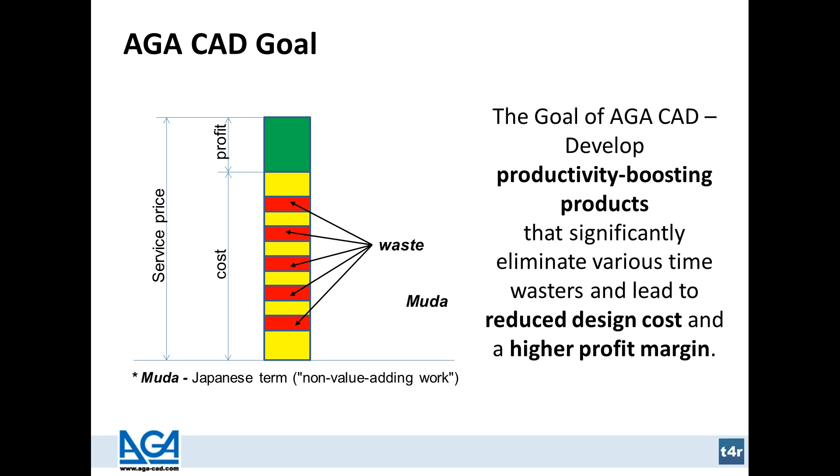The first solution is Smart Diffusers. This solution goes for the diffusers, to insert the engineering information into it from the graphical form into the numerical form, and to use this information in finding the optimal size of a diffuser, or many functionalities there. You can find them also at aga-cad.com. You could look, you could see, you could browse there.

Also we have the R-Heating that goes for radiator heating systems, for balancing them and for many things there. Also we have the Smart Hangers. It's almost a new product from us, so this goes for hanging and supporting elements, line-based elements. We also have the BIM Tree Manager for the management of BIM elements. Also we have the Sustainable Design Pro that goes for building energy calculations, for cost estimation and other things.

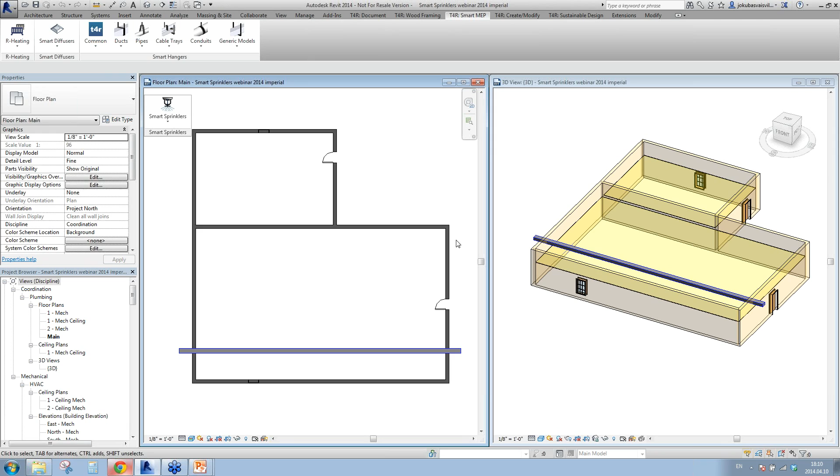Firstly, I will draw a pipe, maybe somewhere here. That will be the distribution pipe for our sprinklers. I will place it 100 inches above the ground - it's not the ground, now it's the ground - and now I will make that.

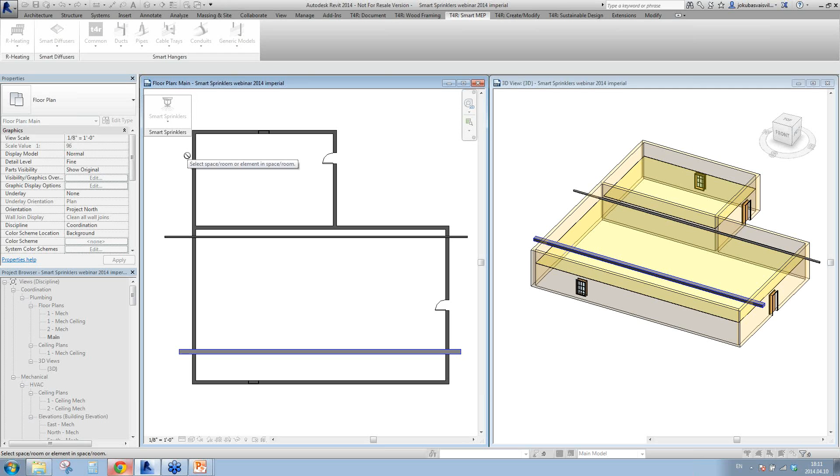Okay, so I will insert the position symbols as I said before. To insert the position symbols, you have to identify something inside the space. Either you can press the button on the space mark, or on the doors, or on the window - it doesn't matter. I will use the space mark.

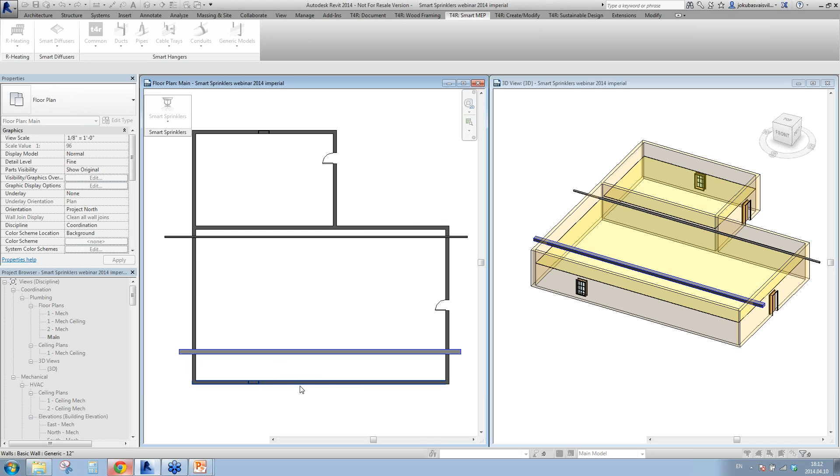After, you have to identify the x-axis, which will go like a wall. You can use any wall in a project to distribute your elements according to x and y axes, and that wall will go for the x-axis. It doesn't matter what kind of project you're using - a real Revit project or a linked Revit project. If you have a linked Revit project, you can press escape to zoom in and press somewhere near here, and it will find the nearest wall, and take that wall as the x-axis here.

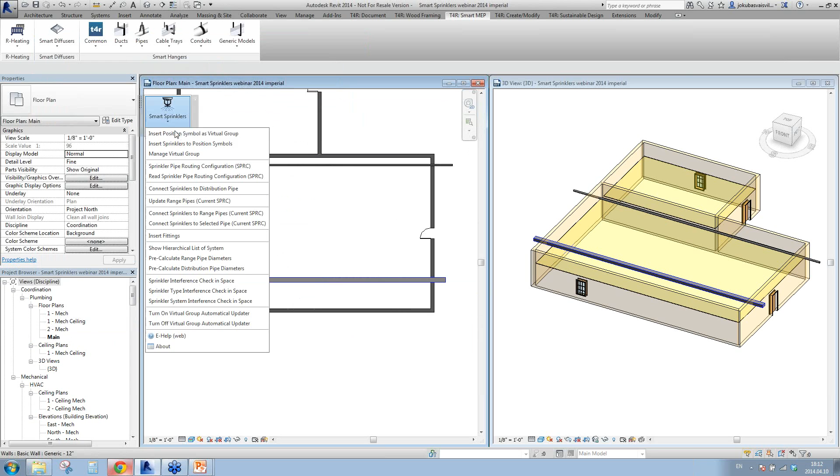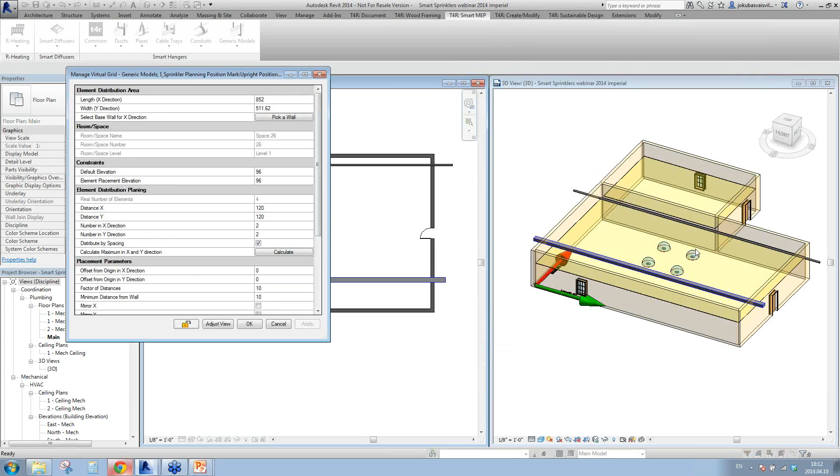Now we have to identify what kind of position symbol we want to insert into our project. We have the upright position marks and pendent position marks. I will use the upright position marks first, and you will see a really simple dialog box for the management of distribution of our generic models in our virtual grid.

In the top of our dialog box, you can find the element distribution area. Our solution automatically finds the lengths and widths of our space, and here we have the possibility to change the coordinate system, as we have y on x or x on y axis. For example, if I take this wall, it will go in a manner like this. If I pick another wall, it goes like this - so the distribution will go by y and by x axes.

The second thing we can find in this dialog box is room and space information. For example, we have the room and space name, the room and space number, and the level where our room or space is located.

The constraints here let you write the elevations of your needed elements, where they should be placed. For example, I want to place my elements at 120 inches above the ground floor, and all my elements will be placed at that elevation.

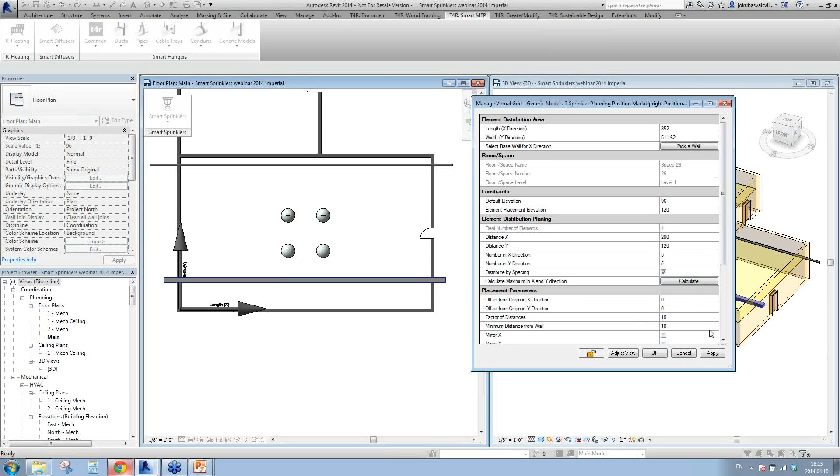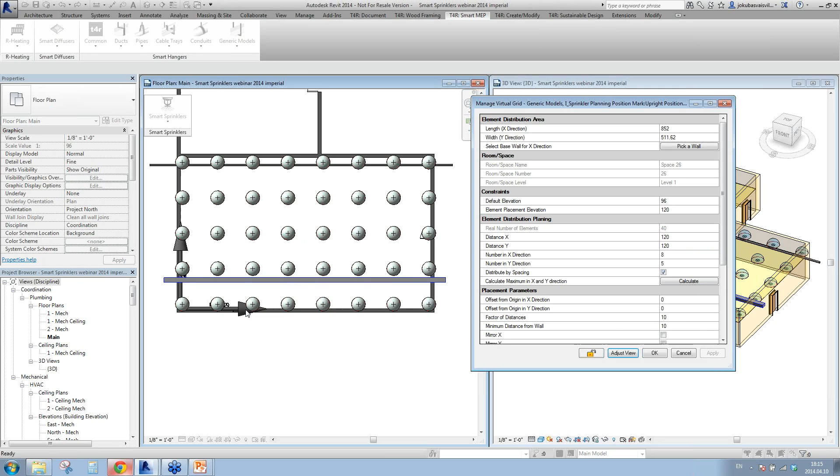Let's check, and we have such a dislocation of our sprinkler elements. For example, I need 120. I recalculate everything, and as you see, in a second everything is working, and all the families are moving just in a second.

The other functionality is, for example, I want to place not all these sprinkler heads, but only 5 by 5 elements in rows. I don't click to calculate my number, but I click to apply that configuration. And as you see, the same distances are now here, but they are in the middle.

If you don't want them in the middle, but want 5 by 5 sprinklers, you can choose not to distribute by spacing and apply that functionality. As you see, it will find the solution to make the distances between elements equal, and everything is distributed like this. So it's really simple and really good.

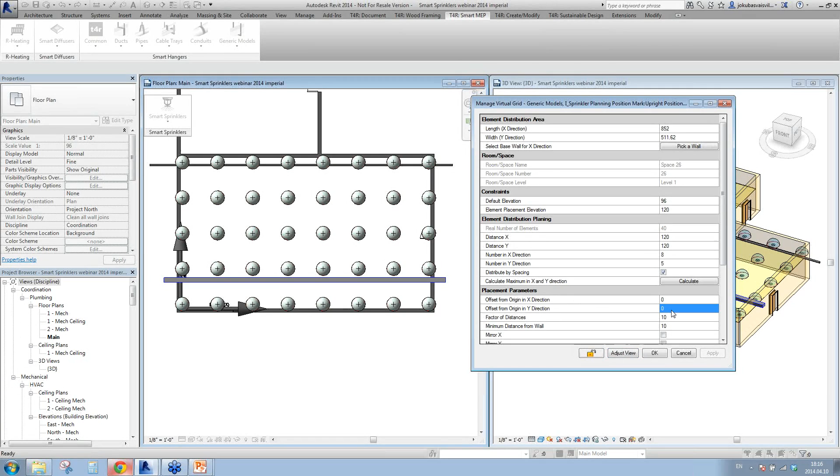As you see, our sprinkler positions are placed where our distribution pipe is also placed. For example, I don't want these sprinklers here, so I could use the offset functionality, and I will offset them by 100 inches like this, but from this side.

But if I want to move them otherwise, we have created the mirror Y and mirror X functionalities for that. I could press mirror Y and apply that to my project, and as you see, it goes from the other side of my coordinate system.

So here we have the factor of distance that goes together with minimum distance from wall. The minimum distance from wall defines the minimum distance of elements from the wall in a space for your own configuration of distribution of virtual grid elements. So your virtual grid elements will never be at less distance than you define here.

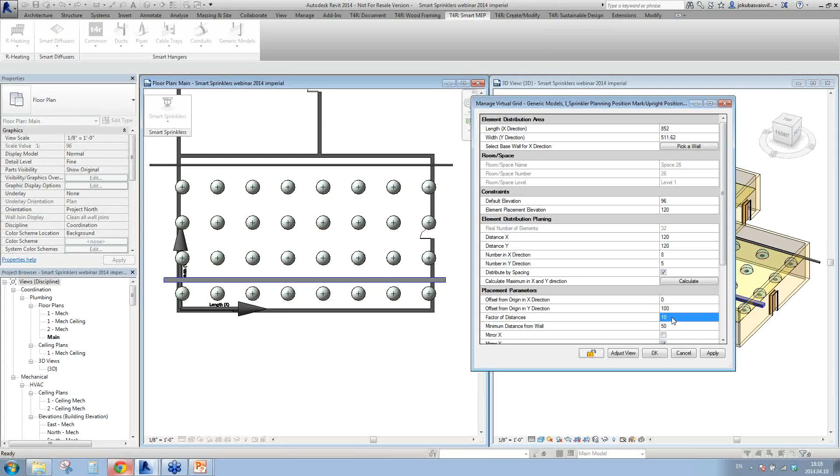And the factor of distance defines the multiples of distance. For example, if your factor of distance is set to 10, then the distances between virtual grid elements are rounded to the nearest number which is a multiple of 10. It's quite simple, I think. And I apply everything, and as you see here, we have gaps not less than 50 inches.

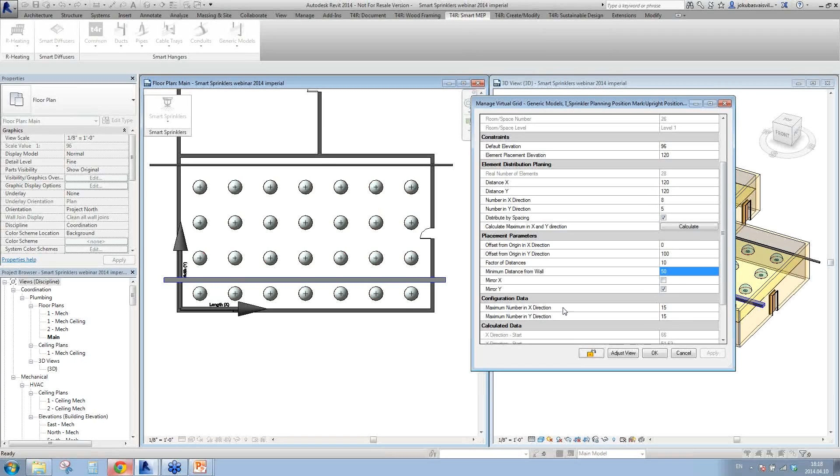The next thing we can do is define the configuration data, the maximum number of elements in X and Y directions. For example, I want only 3 elements, not more than 3, in my distribution of elements. I can apply that functionality, and my 3 elements will be distributed there.

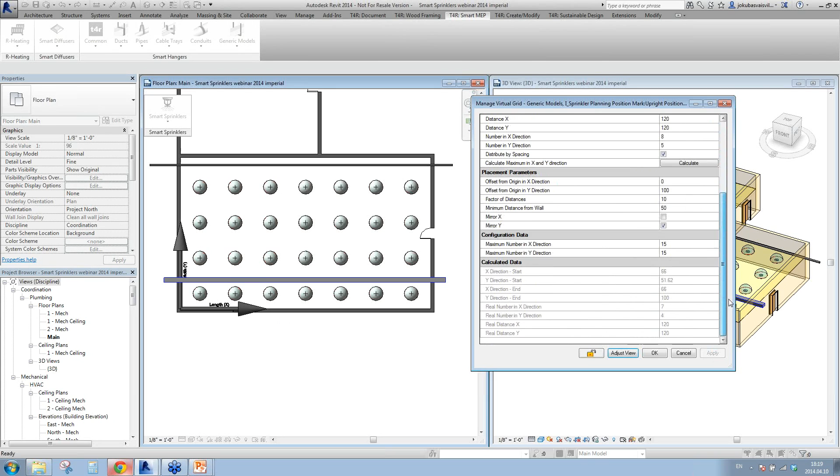I will leave everything like it was, and here we have the calculated data: where our first element is placed on X and Y directions, on those coordinates. So it goes on X 66 inches, and on Y 51. The last is the number of rows and the real distances between our sprinklers.

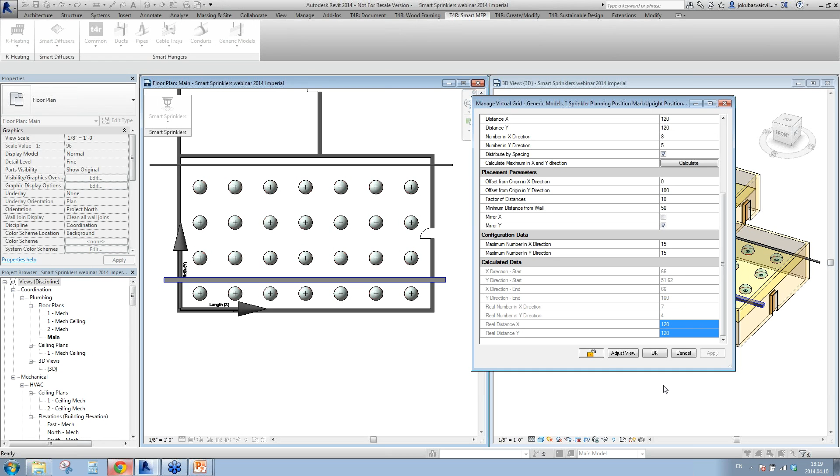So as you see, we really quickly distributed our elements in a space, and I want to do that again for my pendant sprinklers. So I will do it fastly.

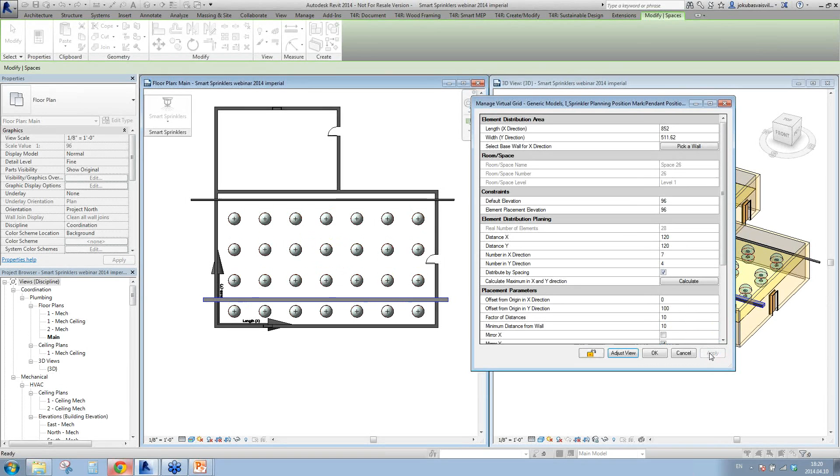Pendant positions, I want them here. I will calculate, place, and make an offset. Okay, we'll make it like this. What's happening? They are in the same place as I wanted, and I can offset them, for example, like this. Oh, okay, brilliant.

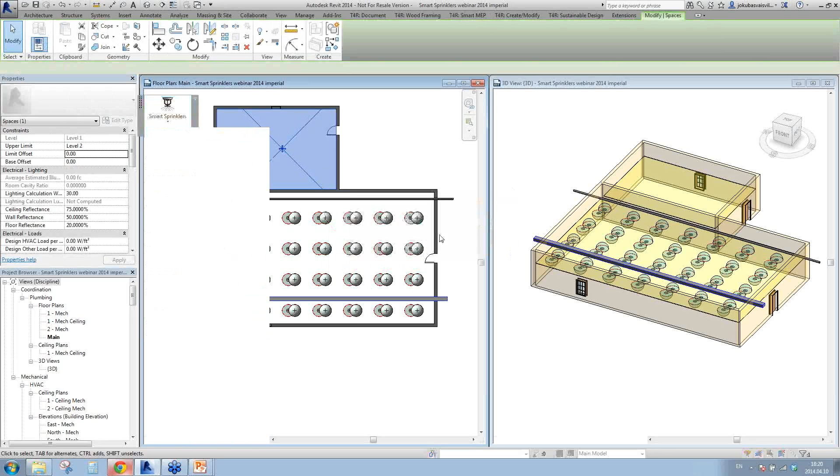Yes, and I will do the same for this little space, and I will show you some more functionalities. Don't be bored, and I will make some interesting things here.

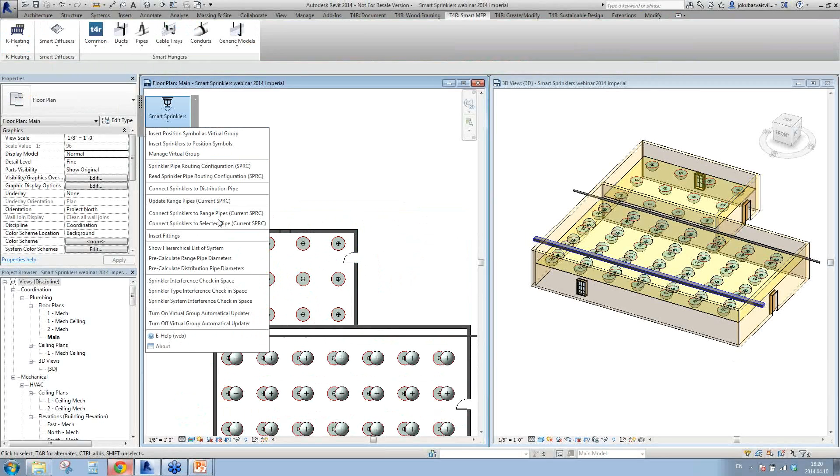As you see, all the sprinklers are distributed like this, and we have created the functionality where you can anytime manage your virtual group in a project. For example, I can make some changes here, like this, recalculate, apply, and as you see, changes happen just in a process.

Now, looking from the BIM side of the design, at any time of a project your architect can make some changes, and you should be able to make changes together with him. So we have created the functionality to turn on the virtual automatic updater. That means if I turn it on, all my distributed elements will move together with the boundaries of my space.

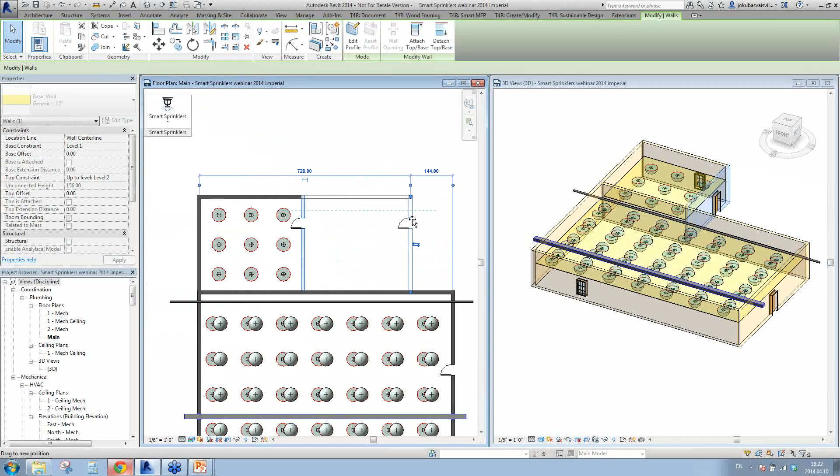But if I turn off this, I could move my boundaries, and all the places will stay in the same positions as before, all the virtual groups, and together the sprinklers. So it's really a useful thing if looking from the BIM side of design.

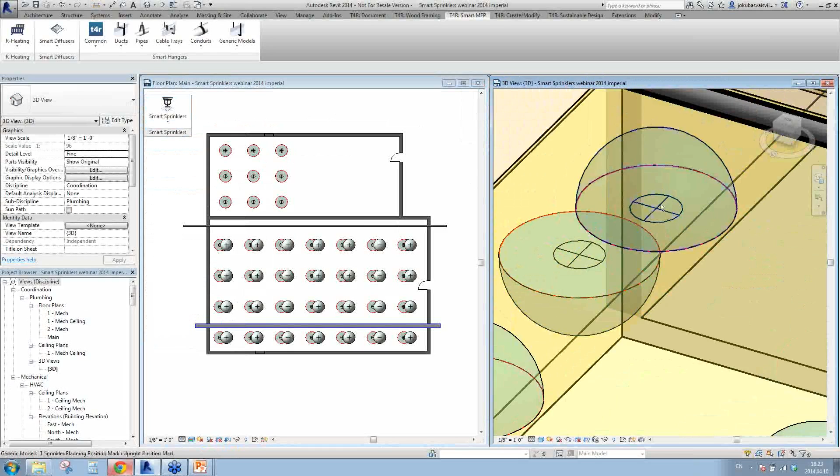The next thing I want to show you is the real sprinkler placement, because as you see, we placed only the position marks here. We could use the insert sprinkler to position symbol functionality, and then you have to identify what kind of sprinkler you want to insert into the project - is it the pendant position mark or the upright position mark? So I will use pendant.

Here we have our created sprinkler heads that you could use and find in our sample project. When you download our sample project and trial our smart sprinkler solution, you could find all these elements inside the sample project and use them.

And smart sprinklers, truly, works with all the families. You can use your own sprinkler families, you could use our created families, you could use Revit families, it doesn't matter. So I will use the sprinkler, dry one, pendant, fully recessed, hosted, and I will use this one.

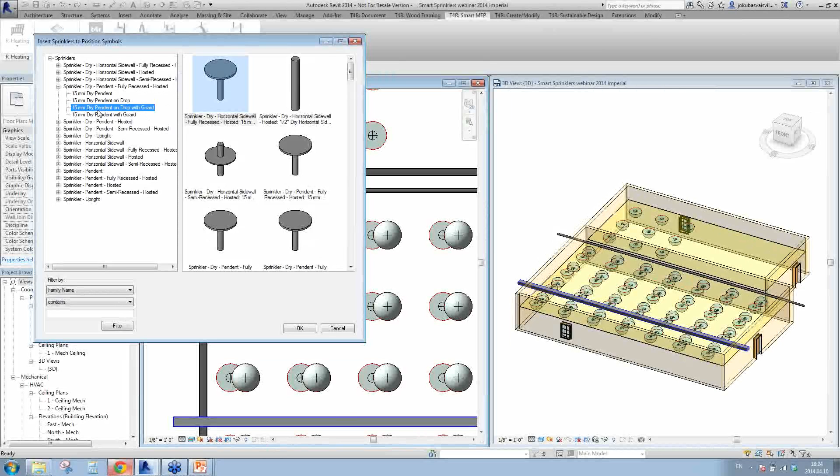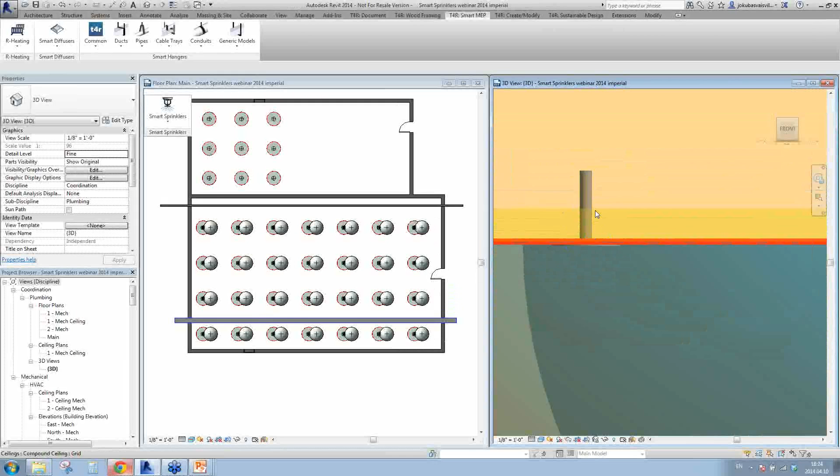Okay, and in a second all the sprinklers are distributed in a space. Let's check them here, and as you see, they are in the very middle of our position mark. If we look from the front, we are face-based elements, so they attach to the ceiling.

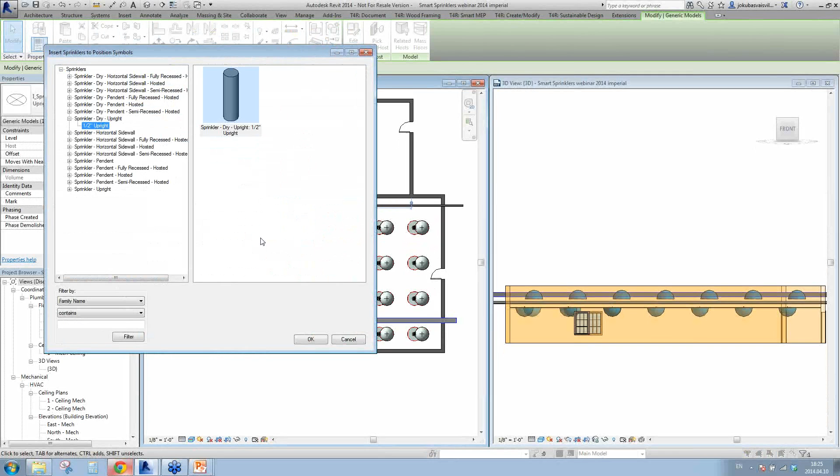And we can place another sprinkler - this is the upright sprinkler - and in a second they are distributed there. Now the second step after the distribution is connection of our sprinklers into one hydraulic system.

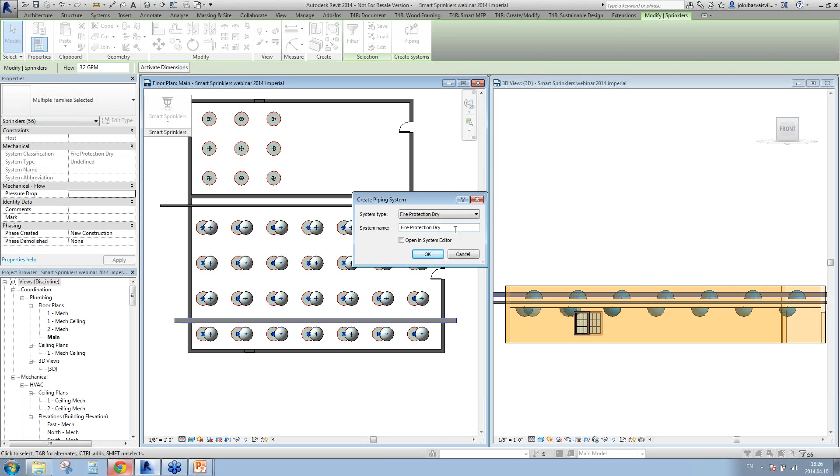I will take them all and filter that. I will use only sprinklers, not generic models that are our planning points of sprinkler places. I take the sprinklers, and using the Revit possibilities here, I will make the piping system, and that is all. Our elements are now in one hydraulic system.

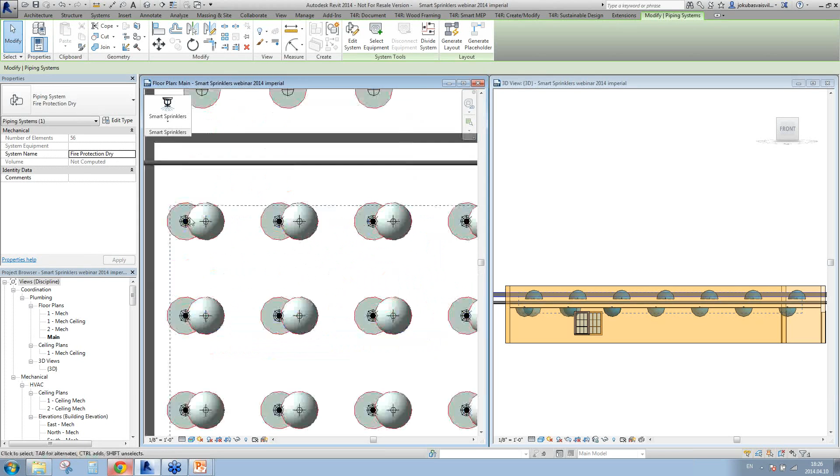Why is that? We have to identify that all these sprinklers are in one system because they have some flow information - every sprinkler has flow information. Afterwards we will see how the smart sprinklers will make some calculations according to your standards, from the NFPA standard that goes for America and Canada, I think.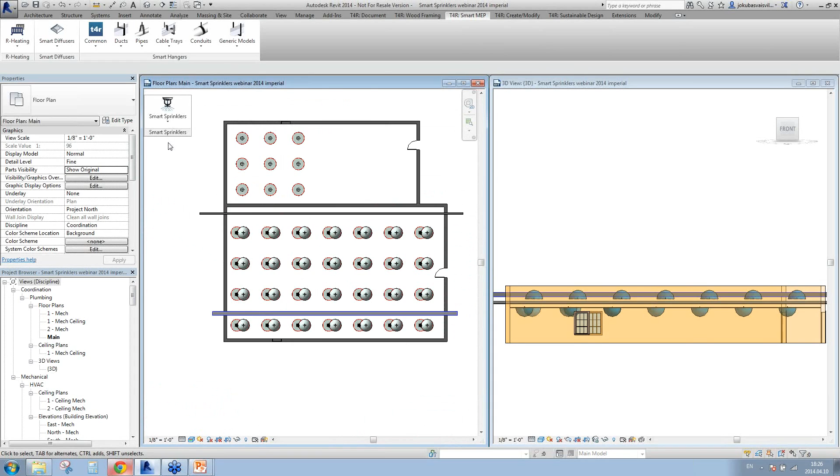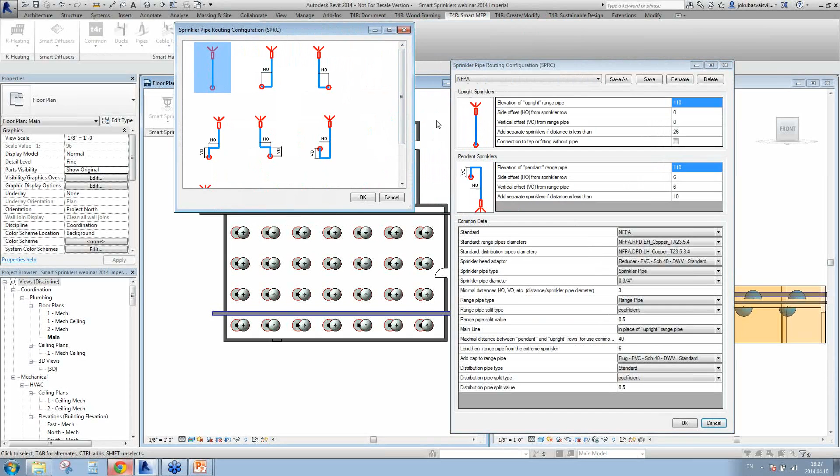The next thing is sprinkler pipe routing configurations. Here we have to identify all the routing things that we will use in our project. At the very beginning, I want to say that we have created the most popular sprinkler connections - you can open here by double-clicking the image. We've created the most popular connections for pendant and for upright sprinklers, and you could use any of it.

The same thing goes for pendant sprinkler. Here we can identify the elevation of upright range pipe, the elevation of pendant range pipe. Here we have 'add a sprinkler' - if the distance is less, this functionality adds a separate pipe to sprinklers if the distance between the main row and the sprinkler is less than entry distance. For example, 26, as before.

Also we created the functionality like a connection to tap or fitting without pipe. With this option on, you are able to connect your sprinklers directly to the taps or fittings - for example, BlazeMaster fittings.

And here we have the side offsets. The side offset horizontally, HO, that means the distance between the pipe and the sprinkler. Also we have the vertical offset, VO, from the range pipe. So it's going like this, and the separate sprinkler is placed here.

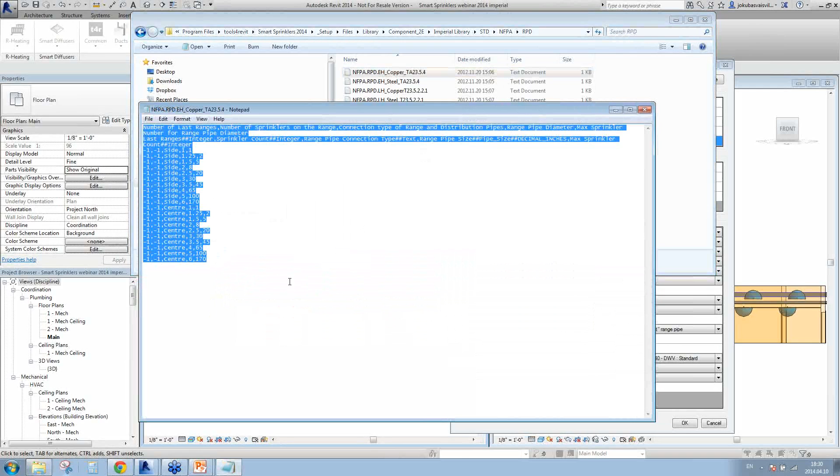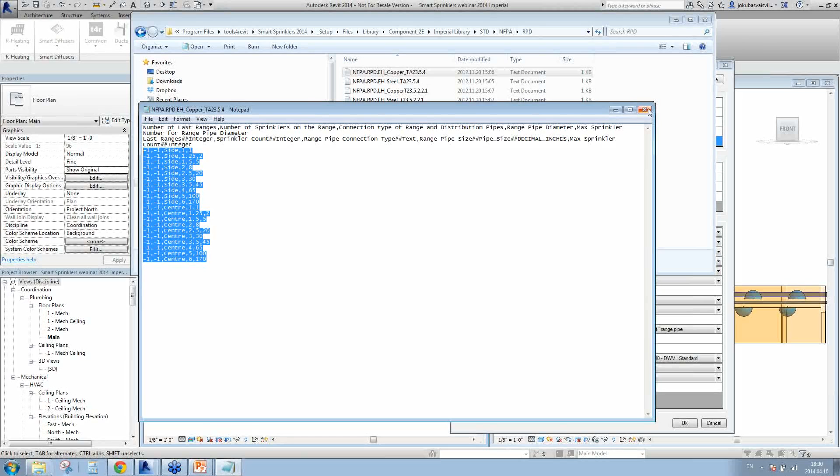All the things are written in TXT files, and anytime you can watch, look to them, and make your own standards for your pipe diameter finding, to find your pipe diameter.

Yes, and you have to identify according to these standards. You have to identify the exact table that is written here, TA 23.5.4. That means that we will use this table from that document, not from the document that I showed you here, but this document is placed on a paper in NFPA standard.

So you have to identify the standard for the range pipe diameter finding and for the distribution pipe diameter.

The next thing what you have to do is a sprinkler head adapter, to find the sprinkler head adapter. As you see, I have here many sprinkler adapters because you can place the families into the project, and if it is possible to use them, they will show all these families here, and it will be really simple to find your needed family.

I will use the generic standard transition, for example.

Afterwards, we have the sprinkler pipe. I forgot to explain - here I have placed my distribution pipe, and this distribution pipe has all the routings inside, the routing preferences, and all the pipes should have the different or the same, as you want, how you work. It depends on how you work.

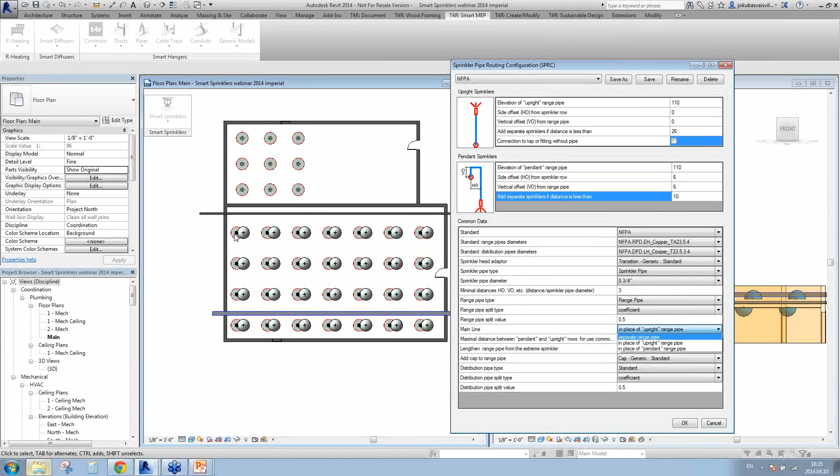Firstly, I will show you the separate range pipe. That means that we will use the separate pipes for pendant and for upright sprinklers. And yeah, so let's try this possibility.

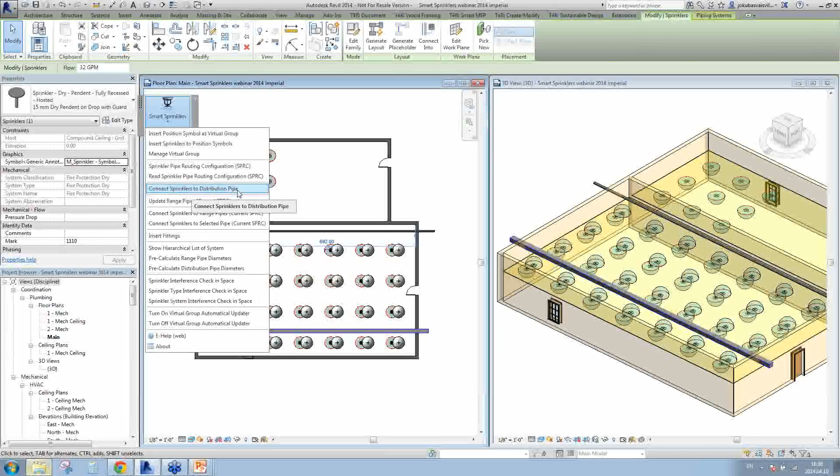Let's try. I will click on any sprinkler in my space, and I will connect sprinklers to distribution pipe, and all the sprinklers in that space will connect according to our created rules, our routing preferences, and our standards. It will connect the distribution pipe, and I have to click onto the distribution pipe.

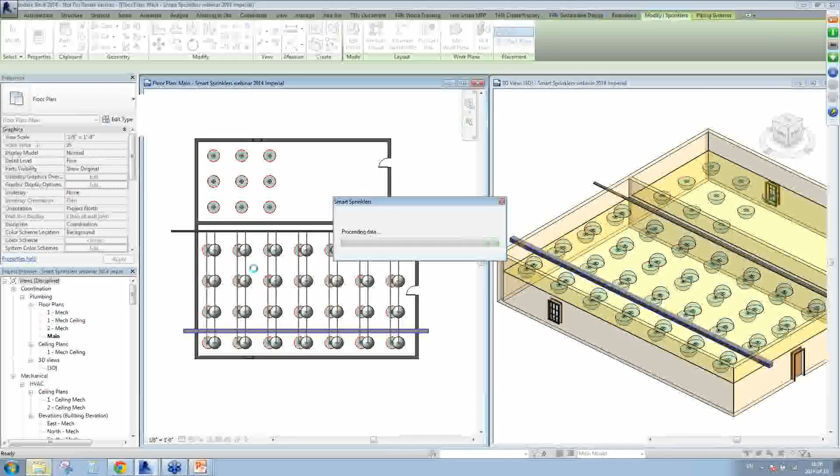As you see, very fast all the pipes are distributed in my space. It inserts the fittings, it routes everything, it cuts in the middle of our pipes, and many more things this solution is doing now.

And we could look here. I will turn off the thin line, turn it on. As you see, we have such a connection here.

Also, I have the straight connection for the upright sprinkler, as I made the sprinkler routing preferences here. As you see, the pendant one is going like this, and the upright is going straightly up.

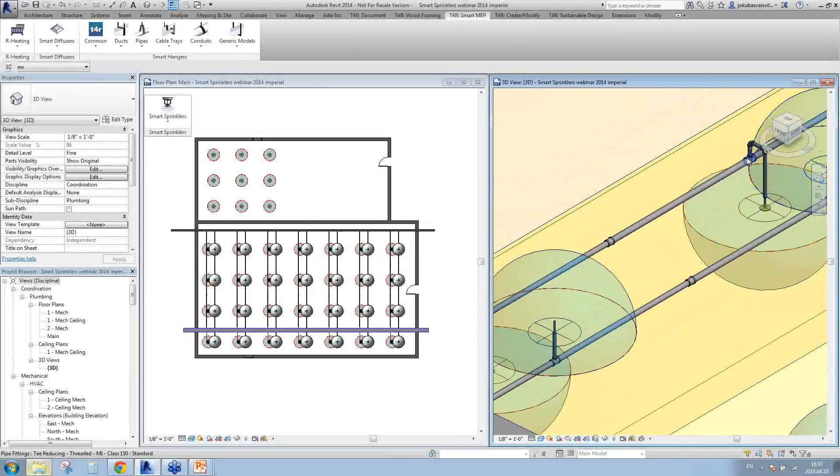Here we have the splitting points. As I said, they are in the very middle of our distance from this connection, and from this connection we can check is it really like this.

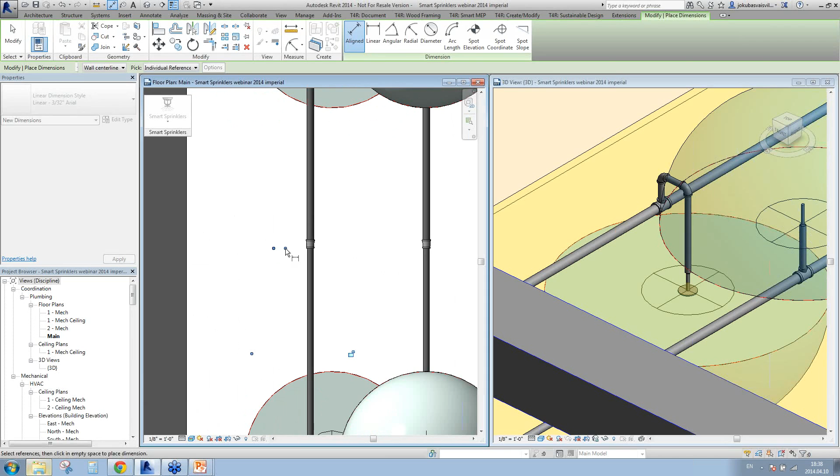I have this point. How could I find the middle of that? From here to here. So as you see, it finds the middle, and it splits the pipe in that place.

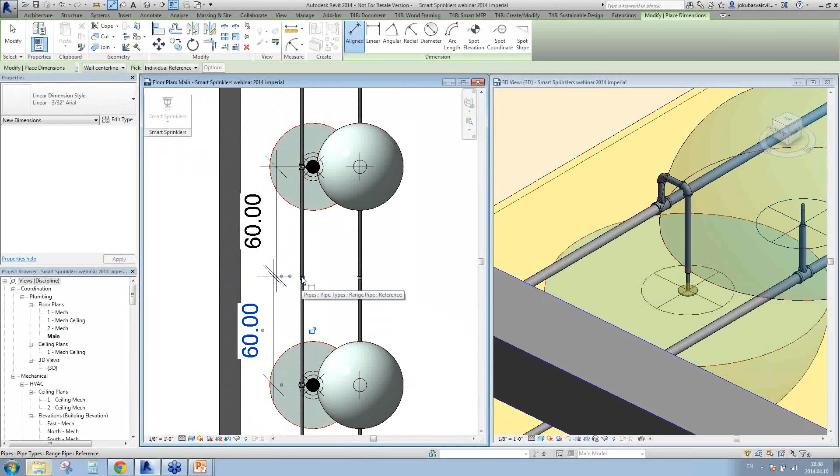I will remove my segments, my pipes from here, because I want to show you the next functionality of sprinkler pipe routing configuration.

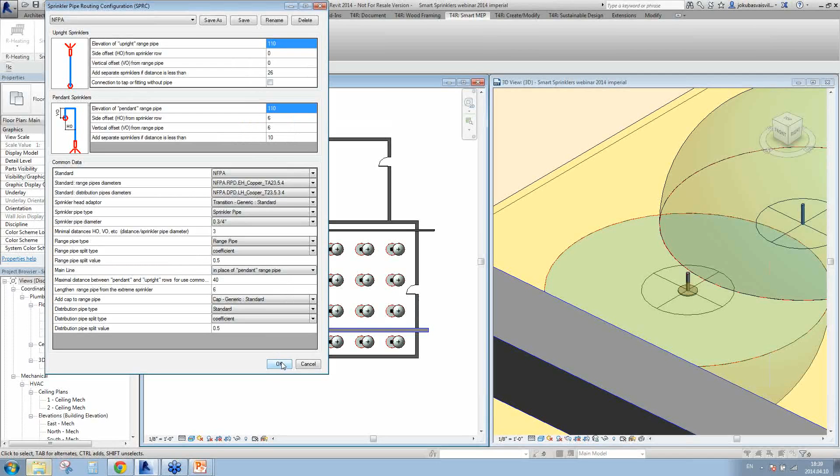It has some differences here. In one way, you could not place the elements, the pipes, in the other way you can, because you have the routing configurations that we made before. One should be the bends, and the other should straightly go to upright.

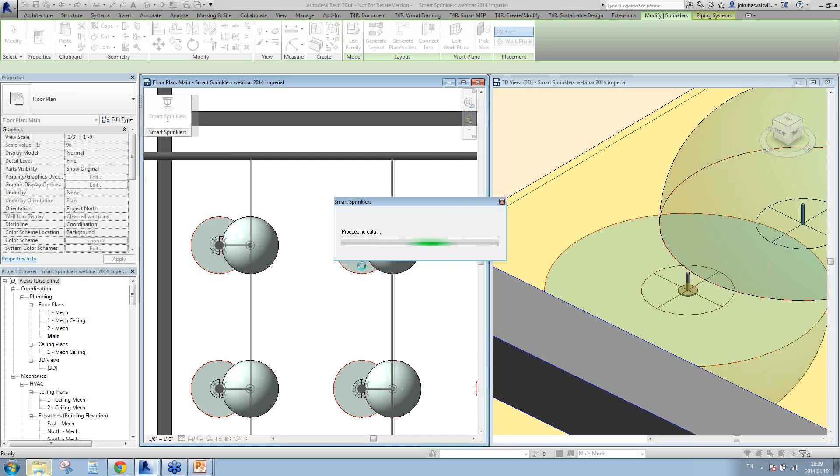And I think everything is going well now, and in a second we will see what's happened, and the result, how our sprinklers are connected now.

So as you see, one of our sprinklers is going straightly up, and the other is going to the bends like this. And you can use various functions here, as I said before, for connection of our sprinklers.

Yes, so it really looks nice, and it's going very fast, I think so.

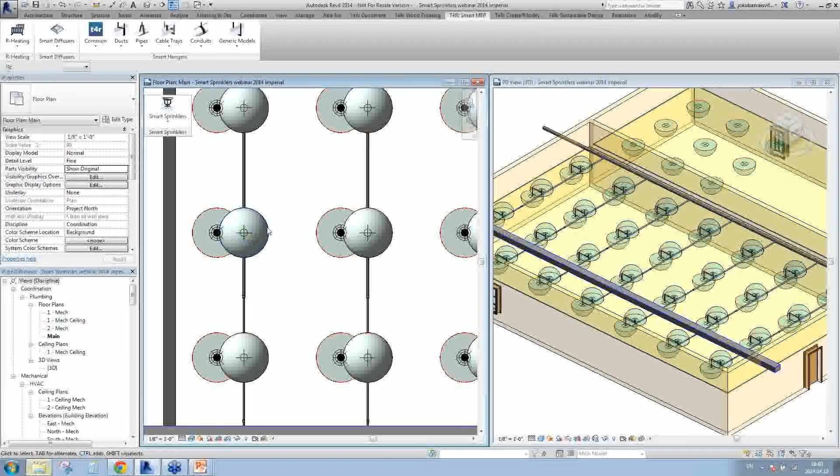If we have some problem that we want to place some more sprinklers into our space, but we don't want to make the distribution again, and only here we want to have fire sprinklers.

We can, I will show you, we can copy that sprinkler and place it somewhere here like this. Oh, I don't copy the sprinkler. Yeah, it's okay. Now I will show you how to work with that.

You can connect your sprinklers at any time into the system and to recalculate the sizes of your pipes.

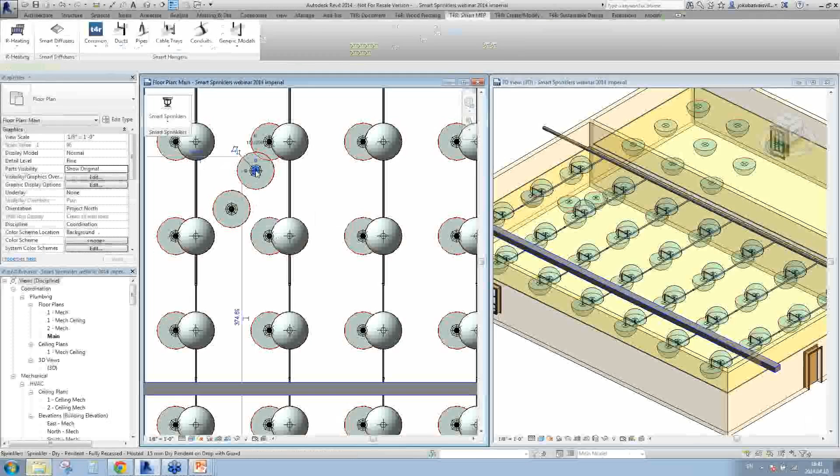And we could use the connect sprinklers to range pipes functionality. We have to identify firstly the sprinkler, then identify the range pipe. As you see, it's really simple. It goes in the same manner as this, because it has the same routing preferences that we made before.

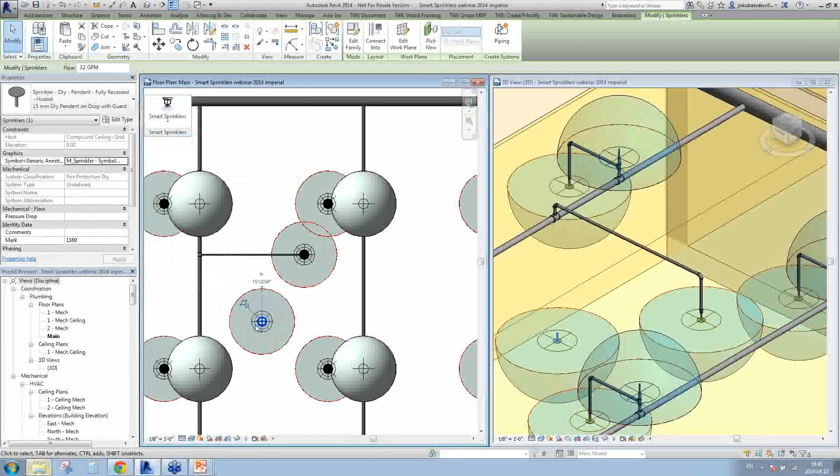Also, we have one here, but for example, I want to make a mistake. I will show you. I want to connect this sprinkler here, but I know that the distance is less if I connect it to this pipe, and it will make fewer elements in a project, and less money wasted, and everything like this.

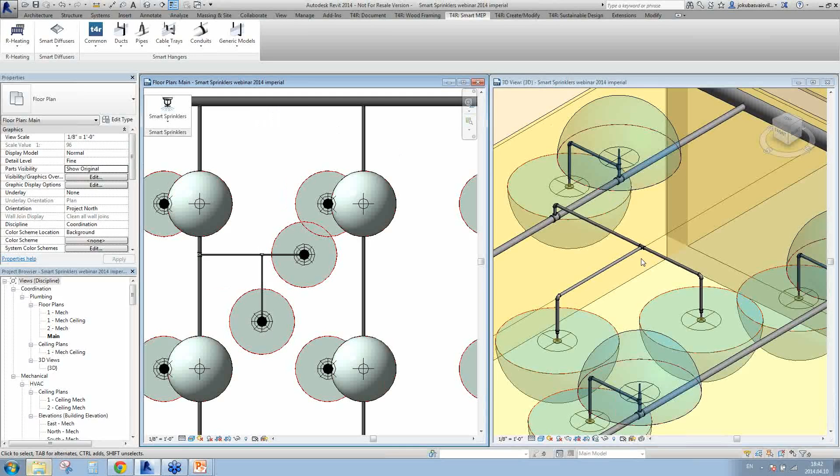So I will connect the sprinkler to the selected pipe, and I will select this, but the solution finds the nearest point to intersect, and it intersects our range pipe, not the distribution line.

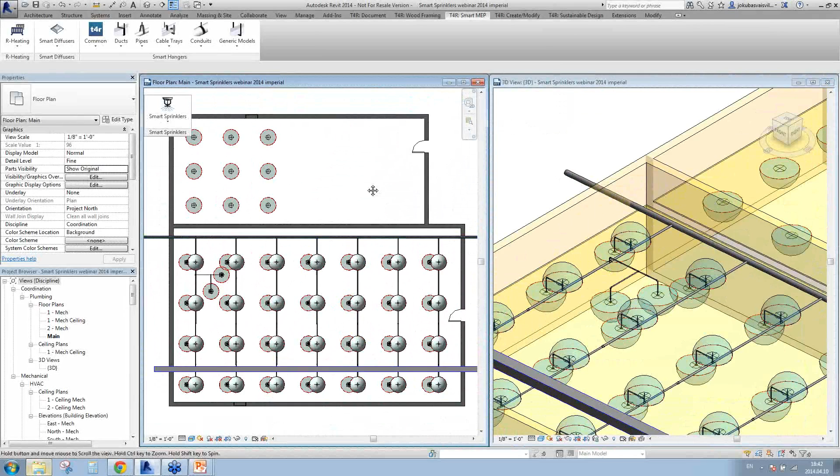And as you see, we have very nicely distributed elements in our project. As you see here, we don't have any fittings.

Why is it so? I don't know, it's not possible. No, I'm joking. We have created the functionality for inserting the fittings.

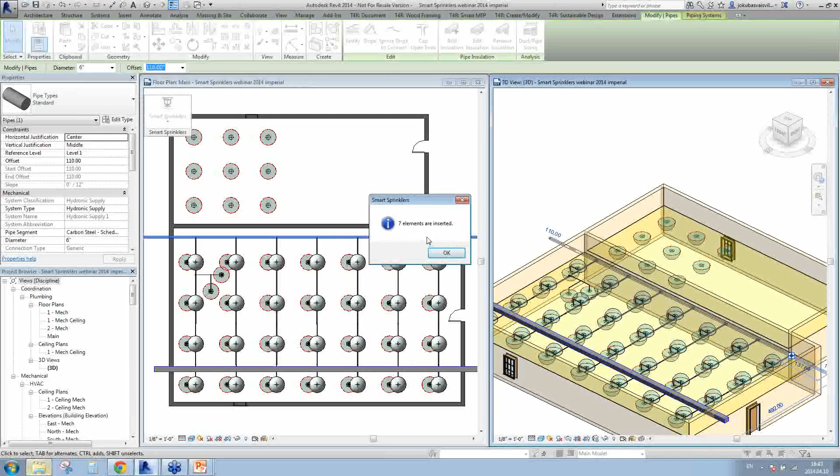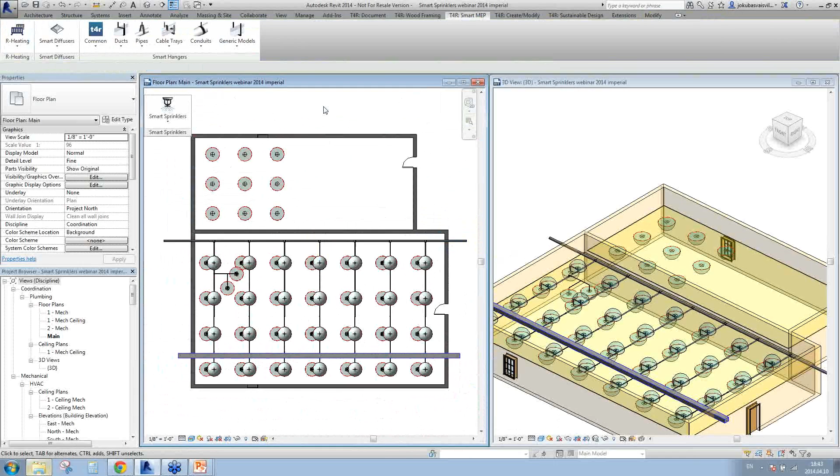I think it's very useful, and I'm happy to use this software while I'm working with fire sprinklers.

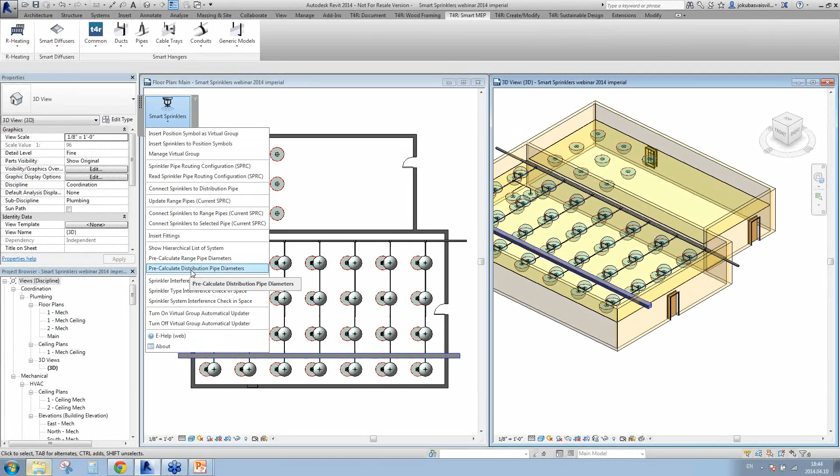The next functionality, as you see, our distribution pipe is going all the way to the same diameter, but we don't need the same diameter because our flow is decreasing, going like this. So we can use the possibility to pre-calculate distribution pipe diameters according to our standards, NFPA, in this manner.

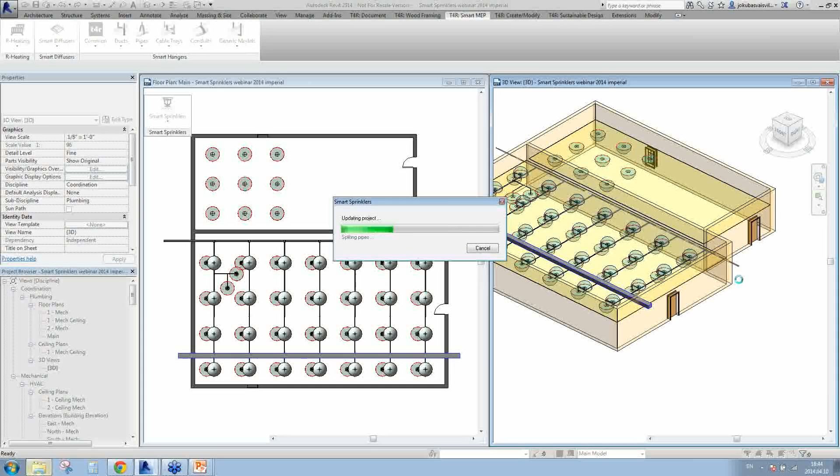And you have to identify the very first point from where you want to start the distribution of your flow, and I will say that this is the first point. And as you see, in a second...

Our solution created the same things like with Range Pipes. It splits in the middle. It makes the connection, and it makes different pipe types here. Very nice.

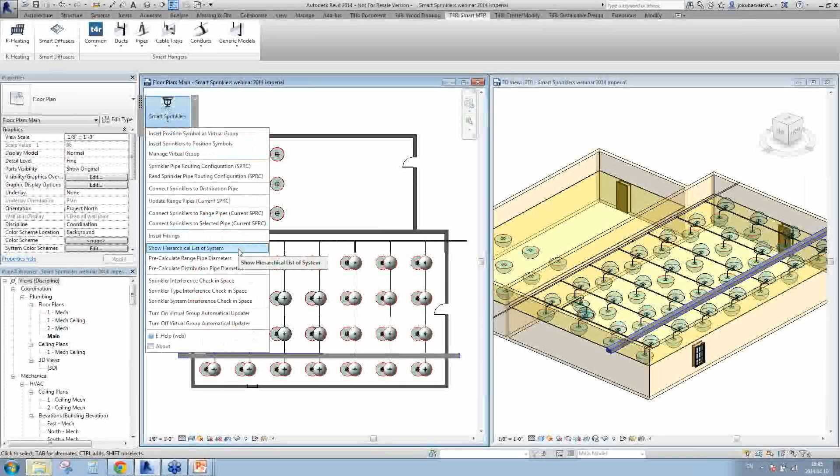Also, we have the functionality that is created for finding some elements in a project, that is a hierarchy list, and also I can find the hierarchy at any time. For example, I want this one, and I see that my element is going in this manner.

So it highlights the elements that are going in one branch of our system. And here we have the second branch, the third, the fourth, and so many branches here.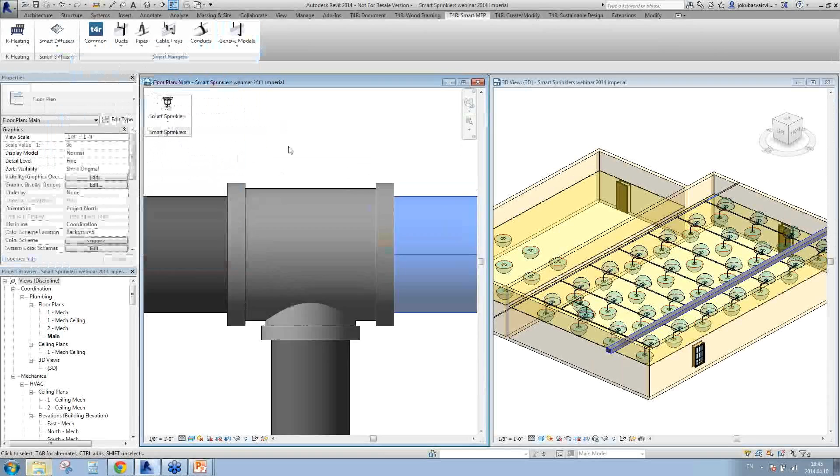Looks nice, really. I think I will show you the last functionality with our interference check. Let me see if I have the interference here. Yes, I have some.

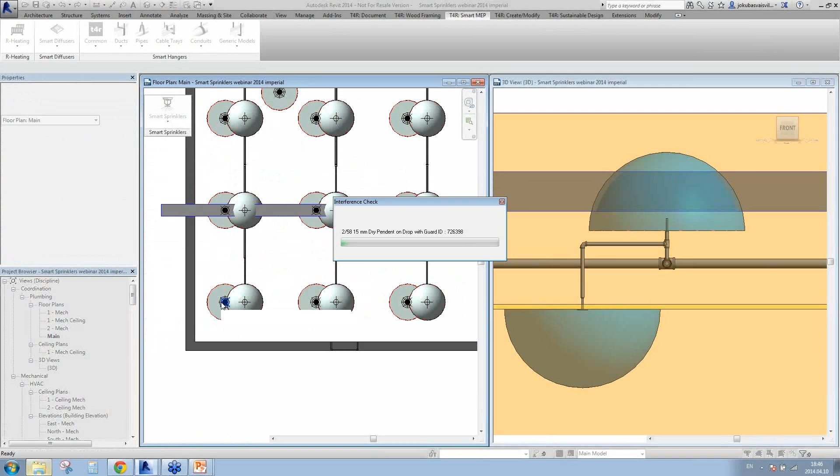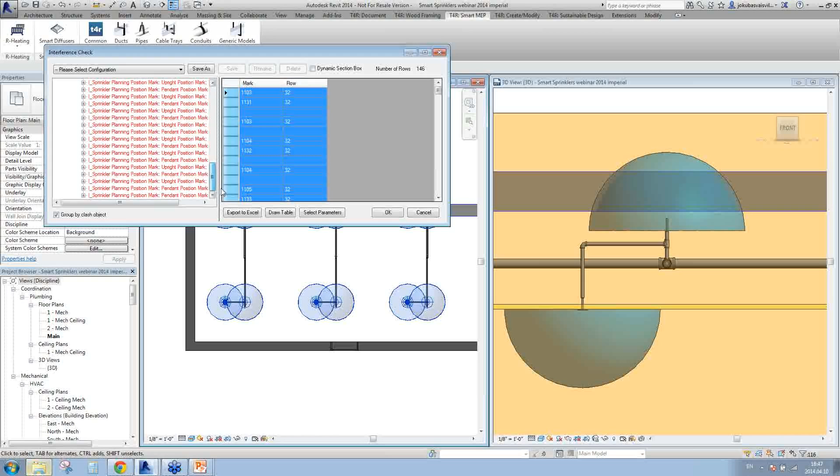So we have created 3 types of interferences. The first type is to check the interferences in a space. I will click on my sprinkler, and as you see, it finds all the sprinklers in this space. Or I could press the button on my position symbol, or at any place I want. And we see that our sprinklers don't intersect the pipe.

Yes, because the pipe is higher than the sprinkler. Let's try to make the intersection here. No, it's still not. Okay, like this. Now it's okay, I think.

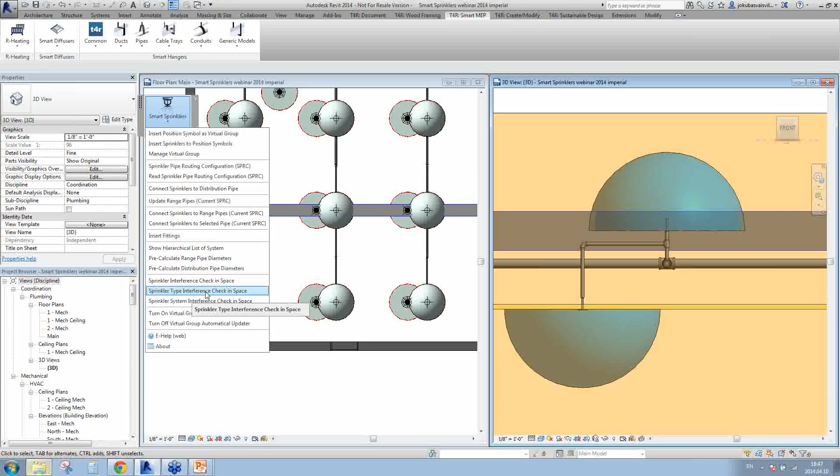Now I will check for the type. If I press on this type of element, I will find the interference check only for this type of elements, and I have only 28 - that's all the sprinklers divided by 2, because I have 28 position marks for upright sprinklers.

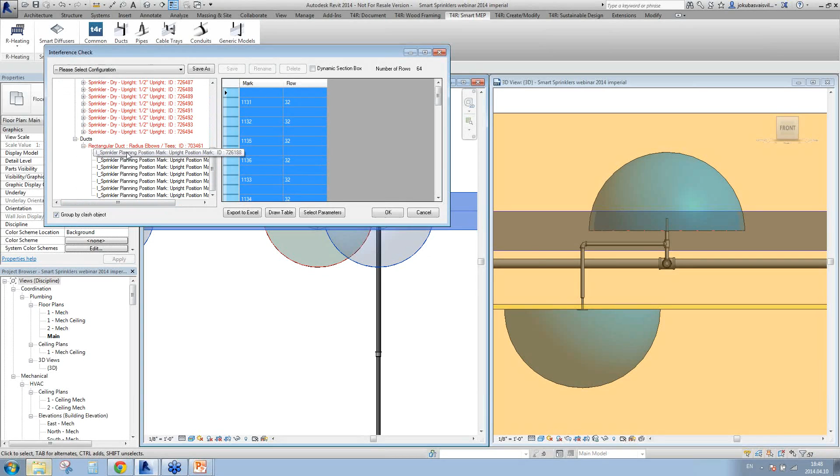And let's check here - yes, we have interferences with a duct, with rectangular duct, with elbows, and many more things. And after this I could use my Revit still, as you see. We could look at our project, and the solution highlights the places where it finds the clashes, the interferences.

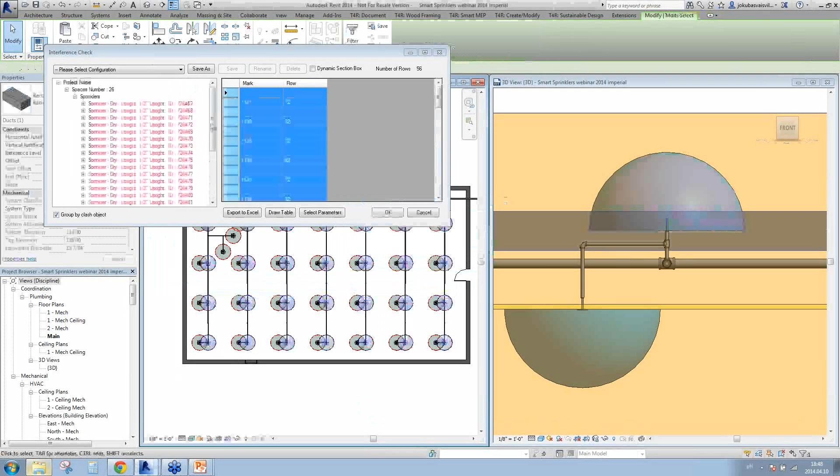That's really nice. And after that, you are able to move your duct, for example, and it will make the interference check again, and it will say that we don't have clashes with such a type of element. The last thing is the interference check with a system, with the whole hydraulic system placed here, and we will click on it.

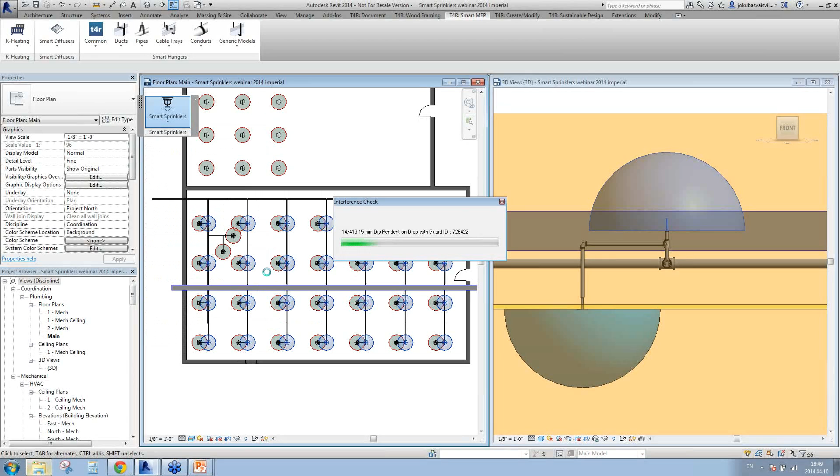Now we have 413 elements in this system, and it will go through all the elements and find the exact places where the interferences, the clashes, could be. It's really helpful when you are working with such situations.

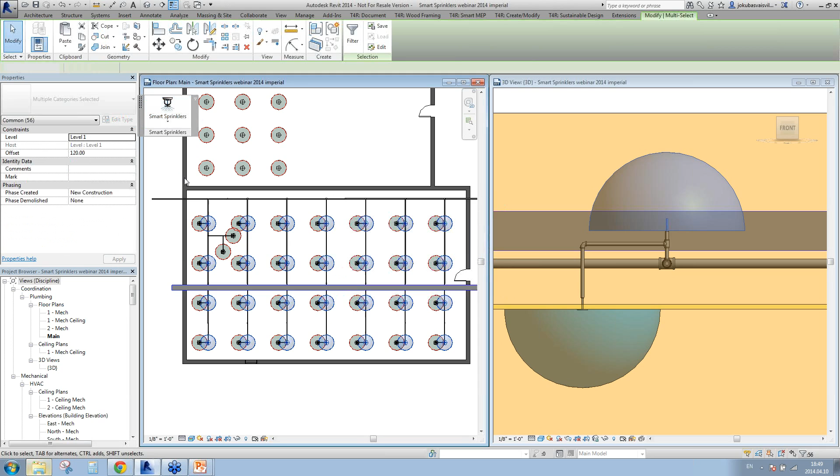For example, I see that we will have a clash over here - the interference between our pipe and our wall. In such a situation, I could suggest the cut opening product that comes from the Tools4Revit that I was describing before, and you are able to find the same clashes with that solution.

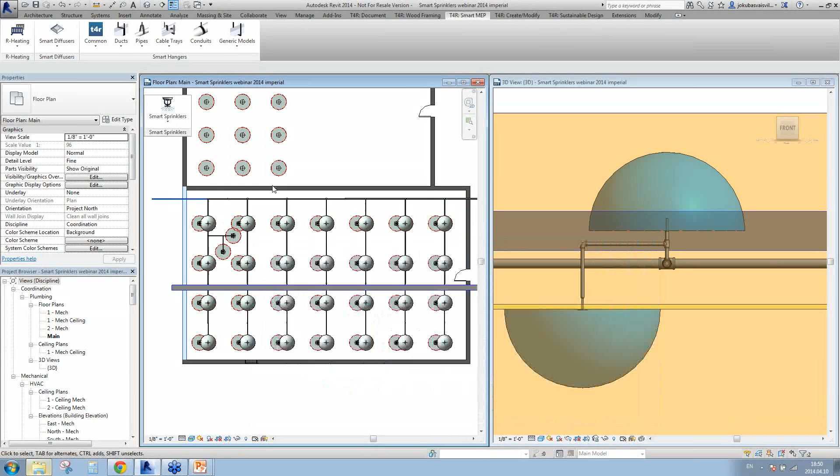And to cut around these ducts, the holes. So let's check - as I said before, we have the clash here and the clash here. So again, you could make your decision what to do with these clashes.

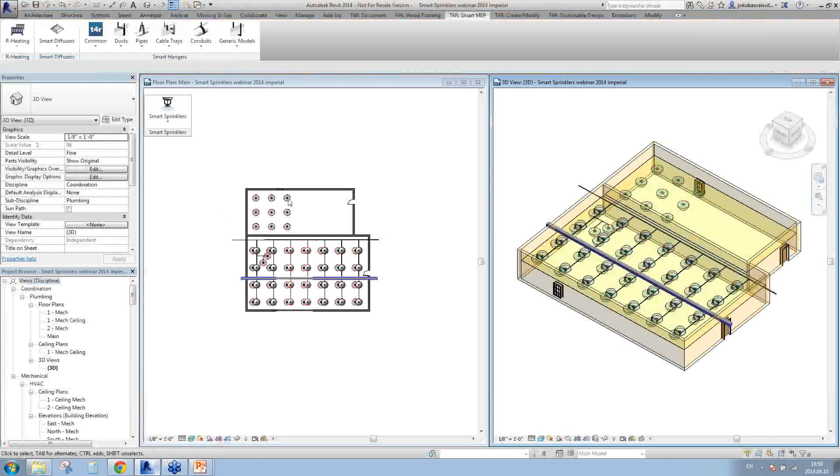That is almost all what I wanted to show you, but I want to show you the eHelp where you will be able to download the sample projects. After you download the trial version, you will be able to download the Smart Sprinklers demo project in metric or imperial style of units. Also, you will be able to use our created documentation for smart sprinklers, the easy way of working with sprinklers.

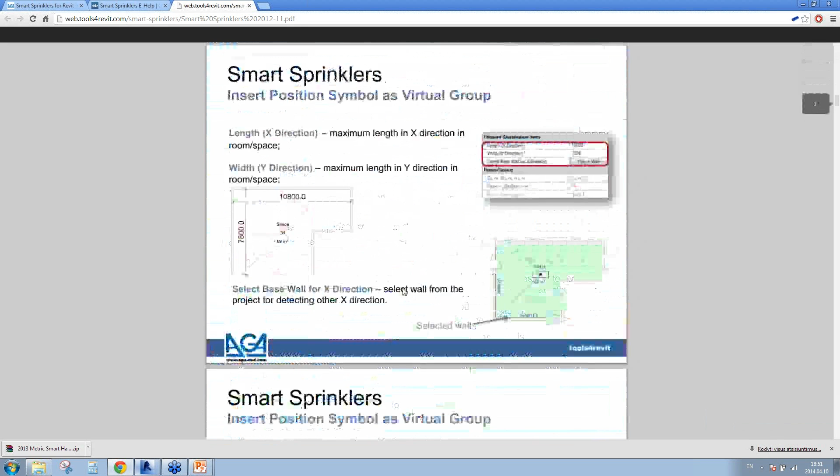Here everything is written, and all the things you could need is written here - how to distribute, how to route all the things, how to find the clashes, and many more things. Yes, also the fire protection system design - that's the webinar that you are attending now.

I wanted to show you the getting started videos. A few days ago I recorded these videos, and you could find them at aga-cad.com in MEP Solutions, where you can find the videos on how to get started - really nice videos of the steps you have to do if you want to update your sprinkler positions, or make or update your hydraulic system.

So if you look through all these videos and read the technical documentation, you will become a pro user of the smart sprinkler solution.